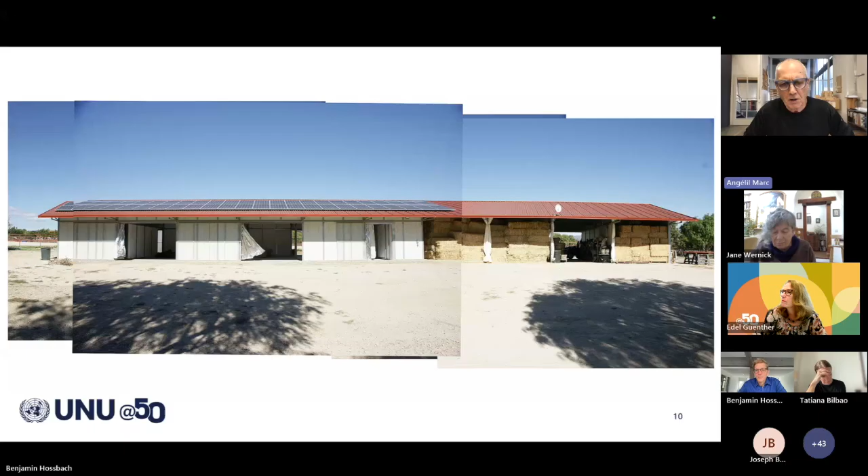Next image. So this is the transformation, never demolish. This is the existing building. It was an original barn for horses, and we decided to transform it into something entirely new. We used the building, mined it to build other structures on site and to transform the building with this surplus material that we found, and we could resource the site. So reuse became a key issue.

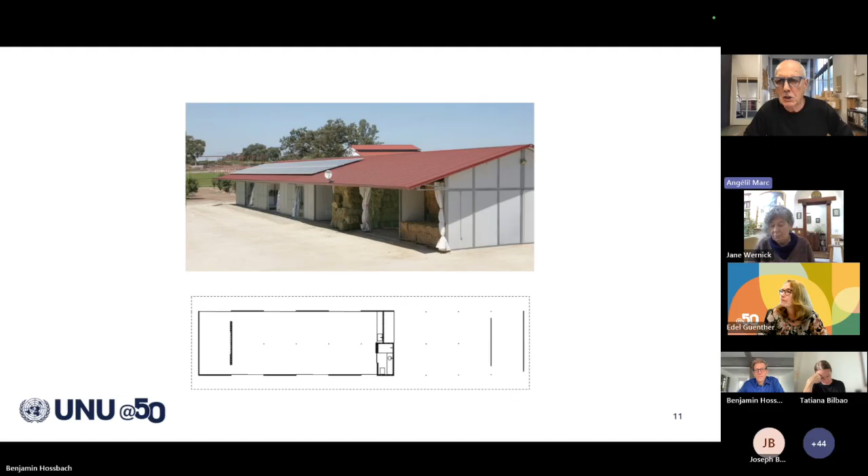It's a pump that provides water for irrigation, but water also to use. And we're using this constant ground temperature of the aquifer, that's 16 degrees Celsius, to heat or cool the building in the winter or summer respectively, via a heat pump. So this is extremely important, so we don't use gas or oil to heat or cool.

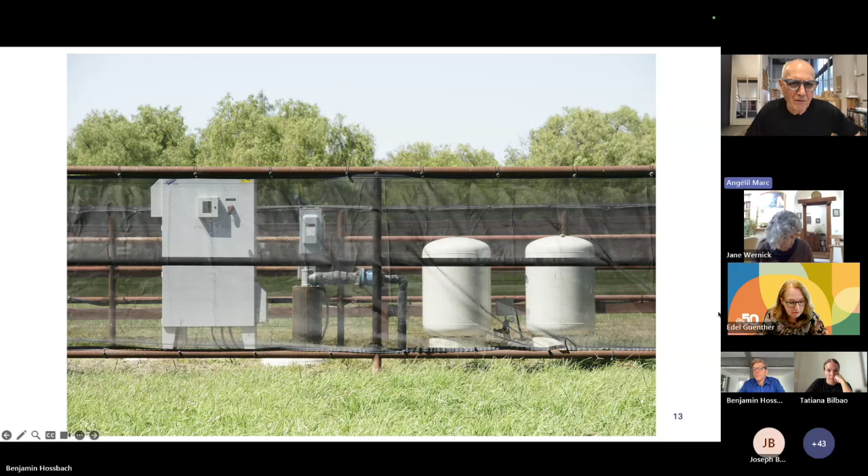Next slide. That pump is activated by photovoltaic panels on the existing structure that we are removing and reusing.

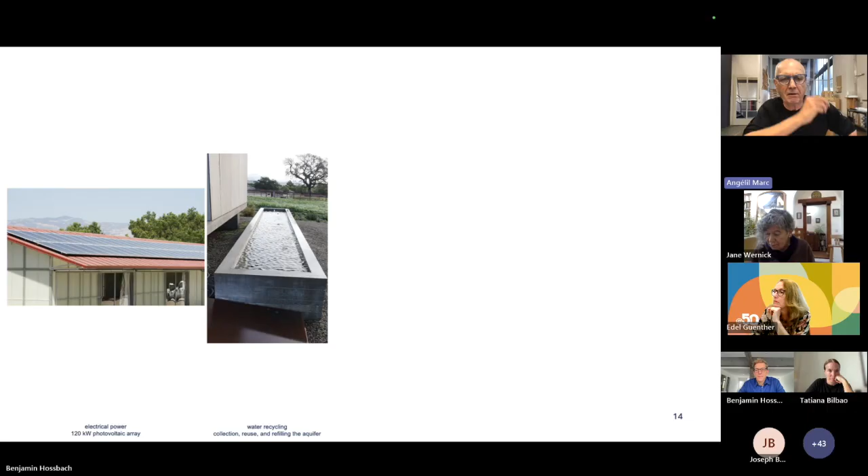Next slide. You see other things that we do, water collection. So every drop of water, because it rarely rains in California, every drop of water is collected and taken back to the aquifer.

Next slide. There are other things such as a gigantic compost for organic waste. It's a kind of organic waste recycling apparatus on site, extremely important because we use this as fertilizer for the ground.

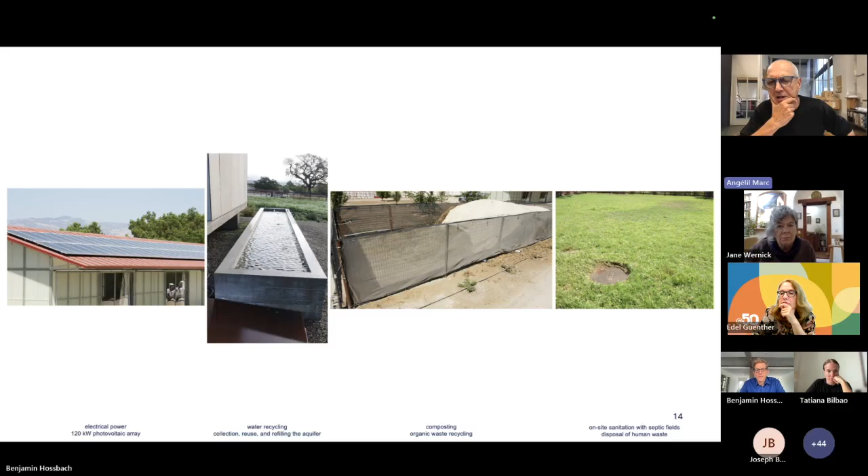And then another important issue, because the entire ranch is off-grid, are the septic tanks for the disposal of human waste and the regeneration of human waste. Next slide. So these are some of the infrastructures that are extremely important.

Then a few words about the plant inhabitants on the ranch, because it is a working ranch. Vegetables, fruits are being produced, hot peppers and hay for the animals. Any surplus material is either sold or given to communities in need, because there's a lot of poverty in the region. So this is an extremely important aspect of what this building is doing, because it's embedded within this framework.

Next, a few notes on the recirculation of materials. The existing barn is on the lower right corner. We use the materials to upgrade other barns. And then we stored the materials on site. We stored more materials, an entire material bank on site, because we wanted to avoid bringing new materials for the building.

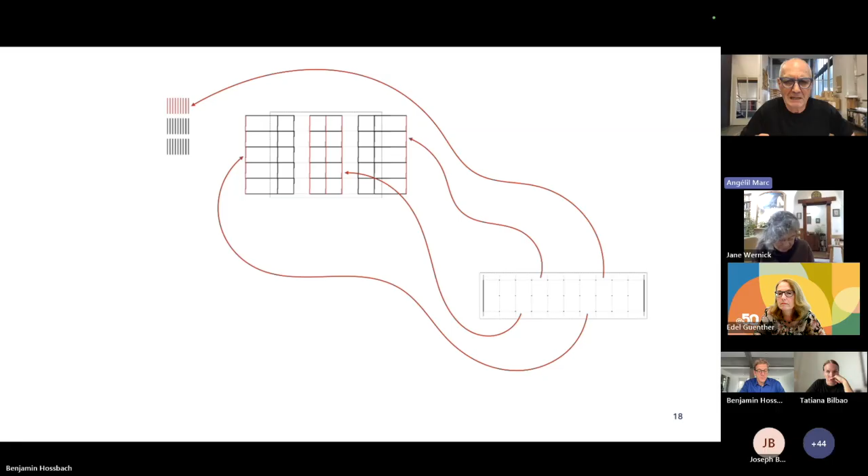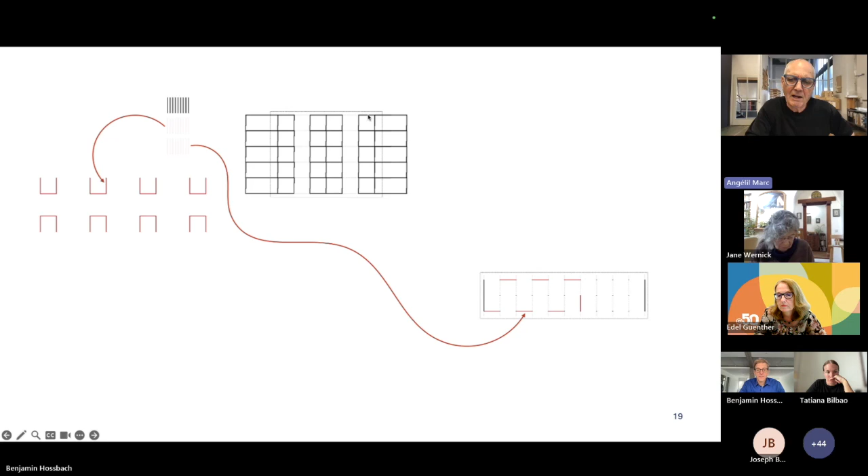Next, some additional barns were built on the far left. And then, in the continuation of this recirculation approach, some material nonetheless had to be brought in from outside for building a bathroom and a kitchen.

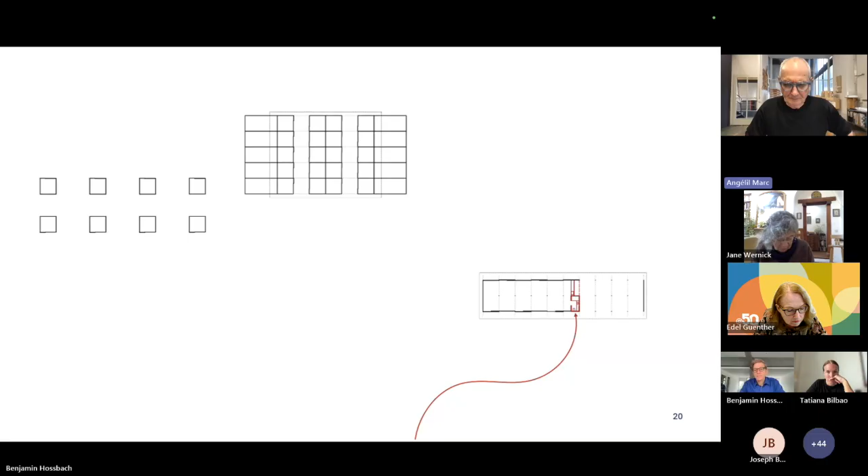So those new materials were sourced from the agricultural sector. There is an entire agricultural industry that produces products that are very rough, raw, robust, extremely important that they are robust. They are locally manufactured and they were affordable. This is a very interesting market.

Those things were used for building the new things. And ultimately, it led us to a fundamentally different understanding of aesthetics and design, which meant that it's a kind of random assemblage of parts that are carefully placed next to each other.

So you have photovoltaic on top of a new roof, on top of a structure that we reinforced. We put in some panels, sliding panels in front, and curtains to keep in the coolness or heat that is produced by the heat pump. So this is not designed a priori, but it is designed through the process by putting the things together.

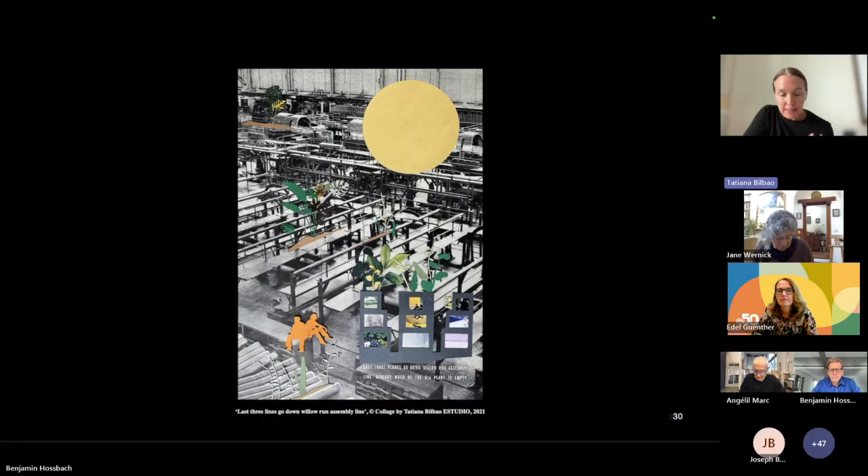I think there are many possibilities, as Edel was naming, on how to approach this topic, and it basically depends on the place where you come from, where you are working. The local specificity is vital for an idea of no waste. We live in a moment where things have become truly difficult because our society surrendered to our capacity of production. In this city, in this society, in this world, we cannot exist if we don't first produce. To exist, we need a roof on top of our heads. We need to be healthy and well fed. But for all those three basic things, we need to be producers first. The irony and friction comes when we think that to produce, we first and foremost need to exist.

So if we live now in the city of production, and as Elisa Iturbe says very well in her essay, the carbon footprint of modernity, we live in a carbon form. So our whole cities and networks are embedded with carbon in their conception. So how can we overcome the carbon form?

I think we have to transform in full our cities of production to cities of care. So my question for a long time has been, what is the city of care? What's the city in which we are able to first live, and then whatever we need to do comes next? So how to hold bodies in the city to exist before they produce has been a question we have been tackling from many angles.

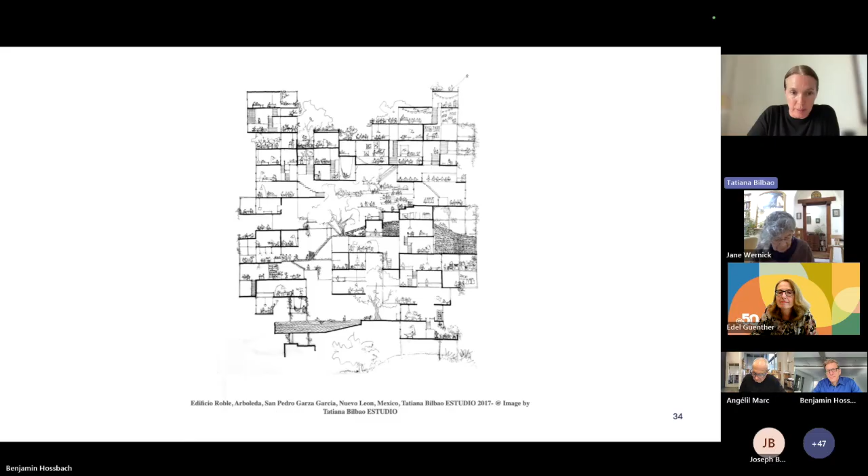A house of care really needs to think about the reproductive labor that is done there—all the things we need to exist: to be born first, then to be taken care of as a child, then to be clean, healthy, and eat correctly. All this labor that is behind these things, that's done in our houses, how can we make these more sustainable and more feasible to be done? Spaces for collective care.

In the built environment, spaces for collective food making, for collective care of elderly people, care of children, but also to think how to holistically include this in spaces that already exist, because the idea of the city of care is to take the places that exist in the city and produce spaces that hold bodies to exist. So housing that is not only boxes for people to sleep, but that takes into account that all this labor needs to happen there, that it cannot happen by someone alone or by a nuclear family by itself, because it's unsustainable. These are spaces for a collective endeavor of this sort.

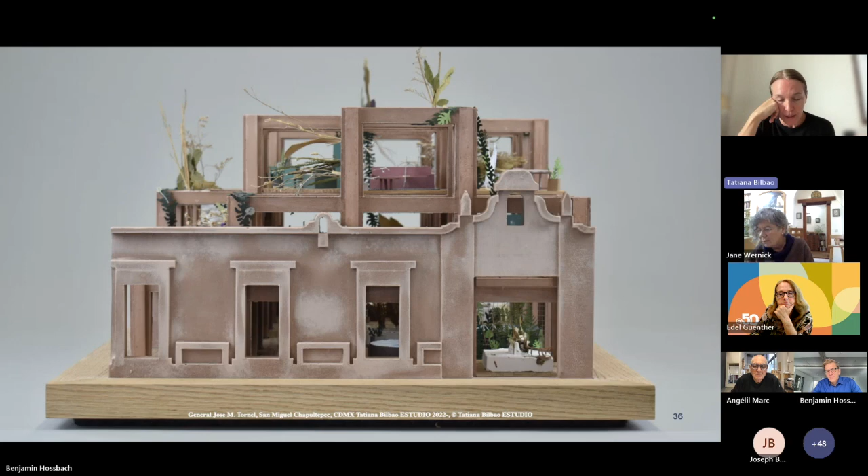In Mexico, we have also been questioning what it means to create spaces of care that are not only private, in the private realm in houses, but that are also public.

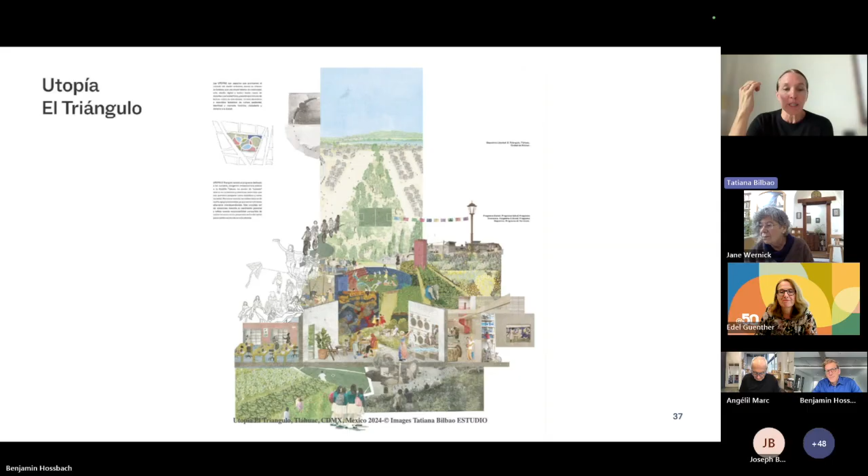We are currently working on a utopia, which is a community space that is really able to create a platform for those who cannot transform their houses into places of care, so that they have a place of care.

So here the main, kind of central area is a social space where you have community kitchen, community laundry, elderly care, child care, women's care, for example doctor's office, but also lawyer counseling services.

There's also a recreational area, which has areas to play, to skate, to just rest. There's a sports area, so you have a dedicated sports area for people who want to become athletes, but also for people to come and have a rehab session in the pool.

So there's a pool, an Olympic pool, but there's also rehab pools. There's a gym, but there's also strength gyms. And then there are all the cultural areas, like a theater and performance spaces, and workshops for music classes.

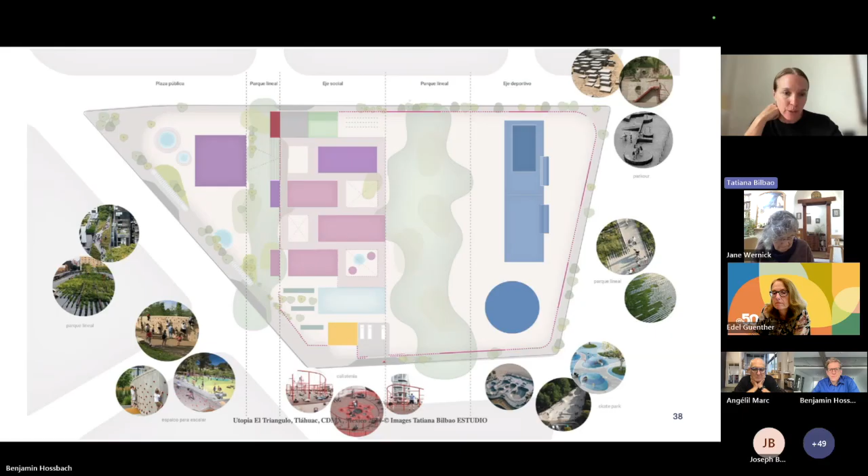These utopias are commissioned to different architects in Mexico. Already 16 have been built, and now 100 more will be built across the whole city. So I think that thinking on care could also be transformed into the public realm and could extend in many different ways.

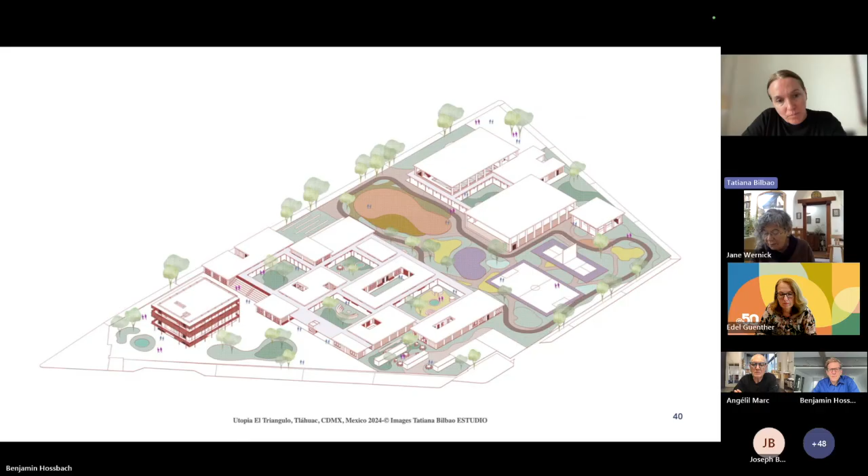This is part of the utopias. We think that these centers, because 16 are already built and used, have produced really good social infrastructure for the city. But also I think that the possibility of this, becoming community centers that knit together people, are also places where the notion of community becomes the sustainable part of the whole built environment.

This one started construction four months ago, and hopefully it's going to be put in place and working at the beginning of next year.

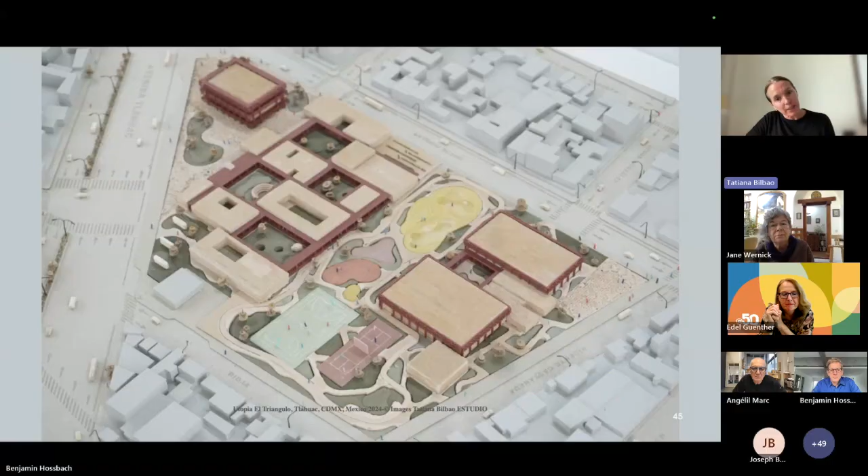The other way that you can approach this topic, as we have been doing, is understanding how to create possibilities for spaces for the conversation to happen, for care conversation to happen.

We have created several workshops where we ask people to bring a piece of clothing that means something to them, or that they don't want anymore and are thinking of giving away, and to bring it with them.

We start conversations by asking questions like: who has cared for this piece of clothing that you have brought to us? What if it has a meaning, this piece of clothing? What is the meaning? Can you imagine who has made this clothing, and what has been the process for this piece of clothing to become what it is?

At the same time, we ask you to cut the piece and start the conversation with your neighbor, and start sewing this piece together with your neighbors.

So in order to create quilts that embed conversations of care of the cloth, of the piece of clothing that you are having, but also in a further sense, of what it means to care for our own bodies.

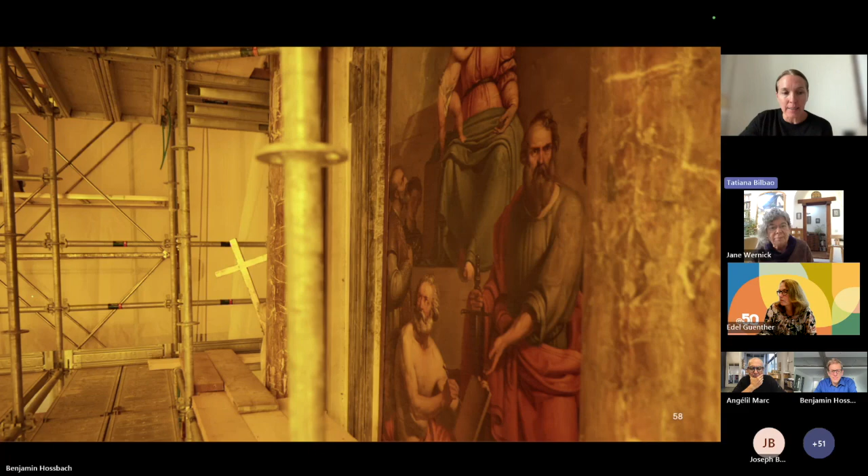Towards a much broader idea on repair, thinking about how this engages conversations on who has the knowledge to repair these buildings, and why it's held only within a professional, elitist society. If Venice can only use its buildings by repairing them, because there's no way of building anything else, and if everybody needs to repair their buildings, and everybody has buildings of exceptional historical value, how can we spread the knowledge of restoring these buildings to a wider audience?

So what we're doing here is, we have the most qualified professionals to repair this building, but they are producing knowledge for the community, through workshops that the University for Restoration runs every Tuesday and every Friday. So we're spreading the knowledge of repair through different forms of workshops, and a lab installed in the pavilion.

We're also opening and widening the public, because what if you are not a neighbor interested in repairing a building? What if you are a visitor of the Biennale? What if you're just a neighbor who isn't really engaged with this topic?

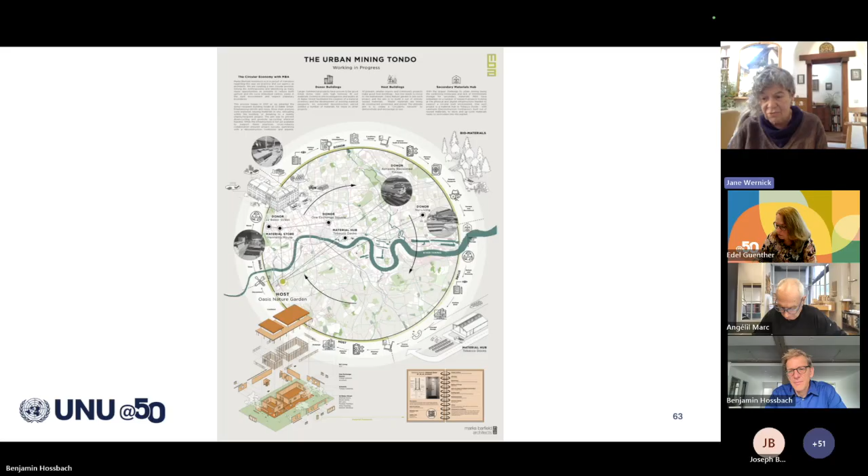So I'm briefly going to introduce a project which was completed in 2023, which used this methodology and which has become the donor building for a current project, which is going to be a major recipient project for many of the materials released. Next slide, please.

So this is their first project using this approach. It's a large office building in London's Baker Street, owned by the developer Lazari Investments Limited. Lazari were keen that the building should be retrofitted rather than demolished and rebuilt, and Marks Barfield worked with them to utilise the Tondo template. The building was originally built in 1904 and extended in 1936, and had undergone a number of major retrofits and fit-outs. This project has a contract value of £12 million, and using the circular economy approach, they were able to achieve cost savings of more than £1.5 million, about 12% of the cost, and also achieve total carbon savings, which is good.

Next slide, please. The exterior of the building, which in appearance is pretty well unchanged, but they did lots of things like introduce double glazing, etc. And the next slide, this is an interior shot of it after completion.

Material reuse focused on three things: reuse in situ, so using things that were in the building elsewhere in the building, also reuse literally where it is, and then also donating to recipient projects. This project really changed the mindset of the developer, who now insists, for future projects, on an obligation to have a target of 50% material reuse on all their projects, and to keep very good records of the manufacture, supplier, and certification of everything in the building, using material passports, and also to mandate that the design allows for disassembly. Next.

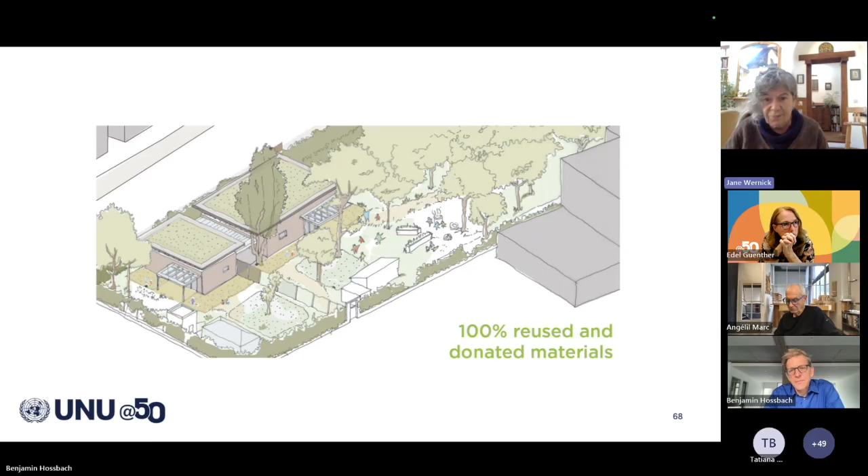They're using their methodology, so the first thing was to look for materials, and this shows the process they use. The main donor project is the 22 Baker Street project I mentioned already, and the host project is Oasis Play. They know they have to store the materials.

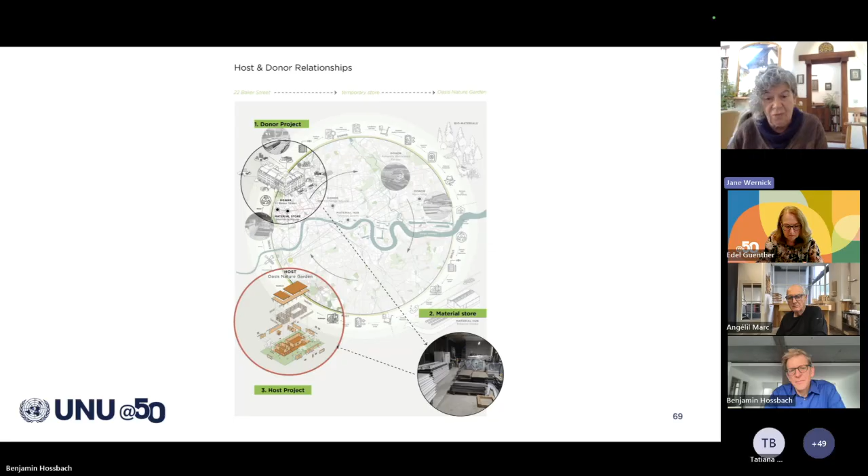This shows the reuse methodology, and they start to build up the process of gathering the materials. This highlights the benefits of the process: reducing costs, saving money for the client, carbon savings, reduced material extraction, job creation, and skill development.

This is a sample showing how they build up their inventory of materials. There's this big process of looking for the materials they need, phoning people up, putting out calls to likely donors, and keeping a very careful, detailed list of the materials.

This shows, on the bottom right, the components needed for the building. They're itemized in the diagram on the left, showing where they're coming from.

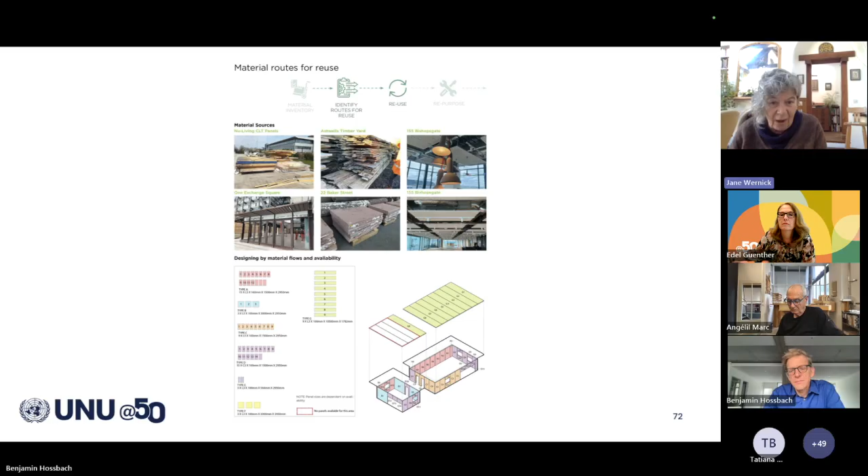This is again showing a build-up. Things being reused are in green, while things being donated as smaller components are in grey. So far for this project, which has now obtained planning permission but hasn't yet started on site, they found 60% of the materials they need.

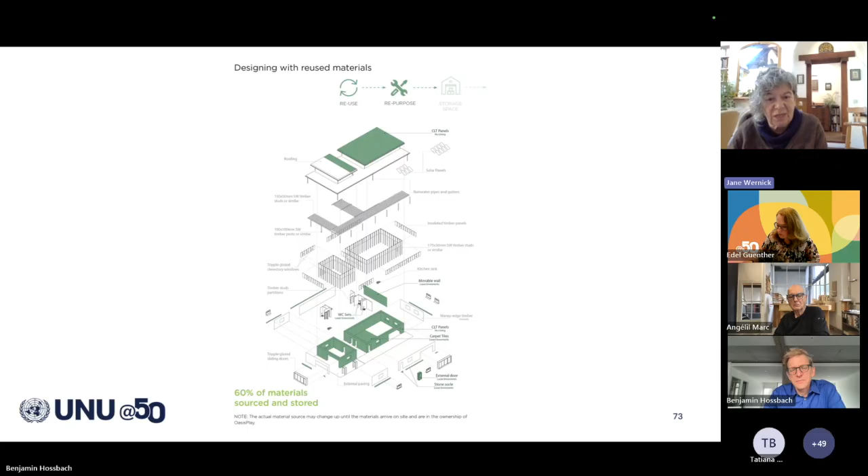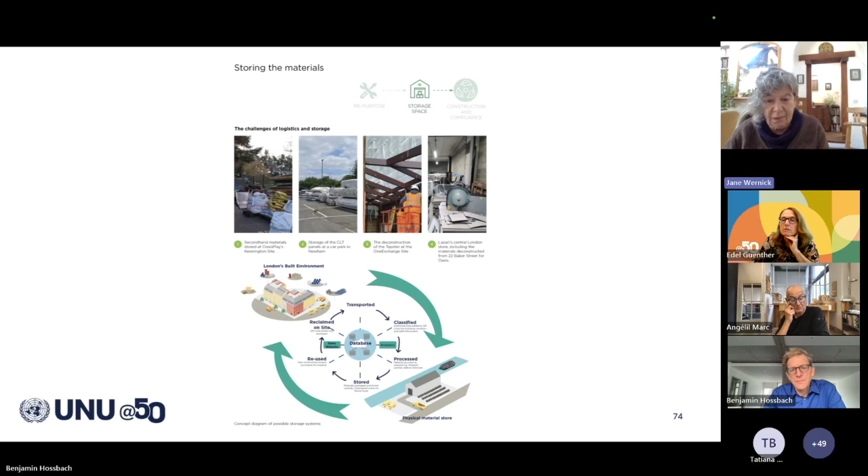They have to show where the materials can be stored, and they found a place in Tobacco Docks. That's where the materials are being stored at the moment, so all of the materials are staying within the London area, meaning there's not huge carbon associated with transportation.

Based on the level of design where they're at, they anticipate being able to save more than 50% of the embodied carbon that would have been emitted if they didn't reuse existing materials. The project has obtained planning permission. It has a project cost of £1.2 million, of which £850,000 has been raised. So this is a work in progress, but we're optimistic that it will be built.

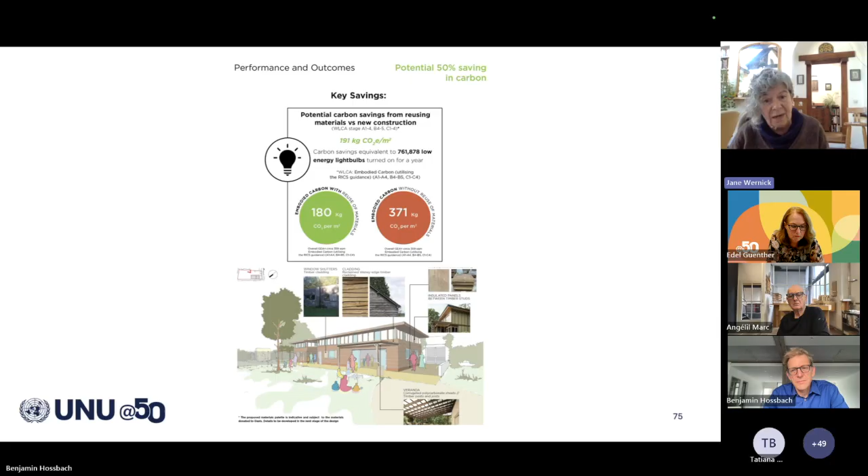Well, thank you, Jane, for this impressive example from Great Britain. I think we've seen three presentations about projects that are by themselves somehow radical and idealistic. I wonder, for our competitors or the next generation we're addressing with this procedure, how can we convince them it's worth following this path, and that it's possible to encourage clients, private or public, who typically are afraid of being radical or innovative, or because the market is against it? What can we give into the sketchbooks of these young, talented colleagues so they're able to convince their partners in the world, and maybe create the right contribution to our competition?